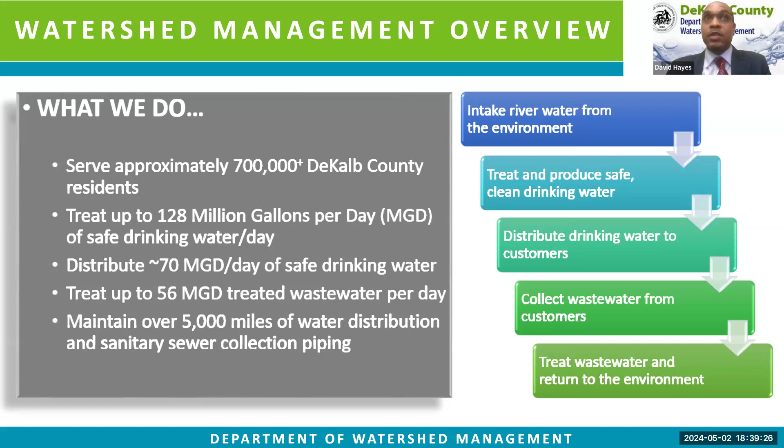We have put together a watershed master plan that was adopted by the board in 2021. That master plan identifies all of the watershed infrastructure throughout DeKalb County, its current condition and state. With that master plan, we have devised a systematic plan to address the most crucial areas first, with the goal to touch every single part of DeKalb County's water and sewer infrastructure, to renew it, to allow watershed to continue to grow and prosper and provide the service that ratepayers demand.

So why are we here today? We have Watershed's own engineering and construction division leading this initiative. They are here to help us correct the problems, and the problem in this situation is the aged infrastructure causing the concerns here. What we plan on doing is replace this infrastructure with new. We're going to have the team tell you the exact plan on what's going into the ground. When we replace this infrastructure, it's going to improve our customer service, and it's going to allow DeKalb to continue to grow, prosper, and bring more industry and residents to DeKalb for generations to come.

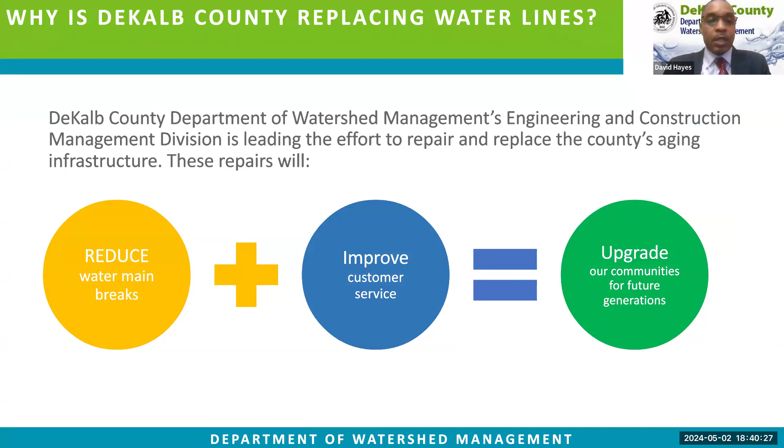Now you're going to hear from our Assistant Director of the Capital Improvement Project. She's going to explain to you why we're here and what we're going to do. She's going to give you a large overview of what we're going to do to correct the aged infrastructure on Woodacres. Ms. Marshall. Thank you, Director Hayes.

Good evening, my name is Cassandra Marshall. I am the Assistant Director of Capital Improvement Projects for Watershed Management. My duties include overseeing Watershed's $2.4 billion capital improvement program and also managing the construction management staff. In the next few slides, I will provide an overview of the system problems and our solution to repairing the aging water system.

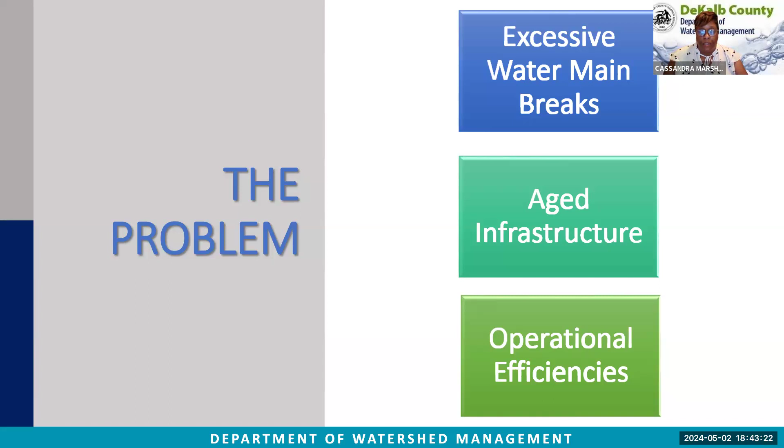So I want to give you a little background of all the components in the county water system and what it takes to analyze and prioritize what gets done first. The county has over 3,000 miles of pipe in the water system to maintain and provide drinking water to the ratepayers. We also have 4 pressure zones, 21 water storage facilities, 16 pumping stations, and 6 pressure regulating stations. As you can see, this is a large system to maintain.

Most of the system is aged and cannot be repaired or replaced all at once. Therefore, the county had to develop a best practice way to evaluate and prioritize how and when the piping will be replaced. The first objective was to model the system. In 2019, the county developed its first hydraulic model. A hydraulic water model is a computer simulation of the water system. The model can provide a big picture look at how the system should function and how it's functioning when you're having issues.

For example, it provides details such as system pressures, available water at fire hydrants, and how tank levels affect the system. To develop the model, we use the county GIS system, meter data of water usage from the billing system, and system facilities data such as water storage facilities and regulation stations.

Field testing was conducted to validate the data, and then the model was calibrated based on SCADA and field tests. The data was ultimately used to develop the county master plan and prioritize projects.

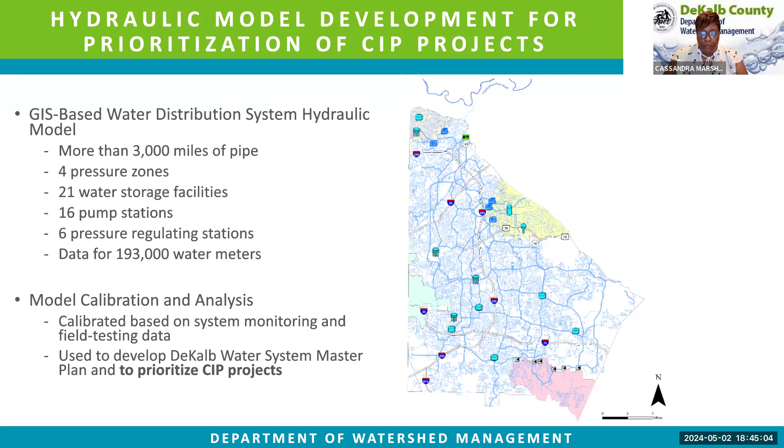So to this point of the presentation, you've heard about the problem. I will now speak about the solution and execution of the CIP plan. So what does CIP stand for? CIP, or Capital Improvement Project, is a project that helps maintain or improve an asset. It can either be new construction, an expansion, renovation, or replacement of existing infrastructure.

In 2021, the Board of Commissioners approved the new CIP program for $2.4 billion for projects to be completed between 2021 and 2030. On behalf of Watershed Management, the department is grateful to all of the commissioners who are partly responsible for the approval of the CIP plan. Thank you, Commissioner Patrick, and thank you, Commissioner Terry.

The Woodacres Water Main Replacement Project is a $6.9 million project included within that CIP plan. My team, the CIP team, is responsible for getting the work done. My team includes 4 DWM construction managers and 12 licensed inspectors.

Next up in the presentation, you will also hear from the DWM construction inspector, Mark Nooks. He will be your primary contact for any issues or complaints for this project, and he has over 20 years of construction experience. Along with in-house staff, we are also supported by consulting firms who help assist the county with construction management and inspection services.

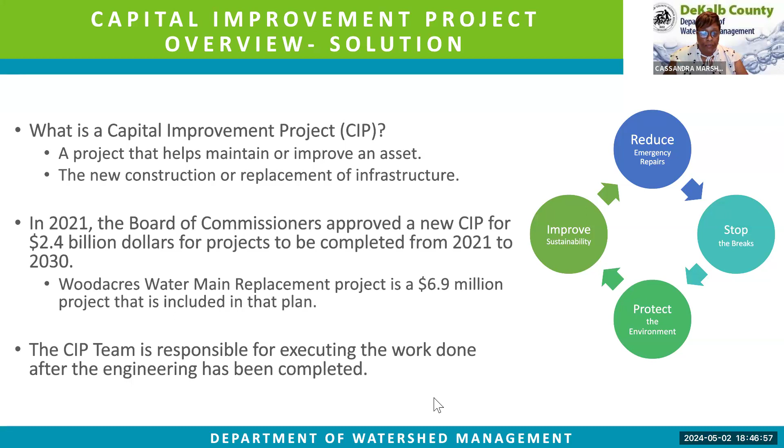You will now hear from Mr. Mark Nooks about the project scope and overview. Thank you, Ms. Marshall. Good evening, everyone, I hope you're doing well. My name is Mark Nooks, and I am the Senior Construction Inspector assigned to the Woodacres Water Main Replacement Project.

On the following slide, I will discuss the scope of the upcoming work planned for your neighborhood. The planned work includes installing nearly 12,000 linear feet of 8-inch ductile iron pipe water main, including service lines, hydrants, valves, pavement restoration, and setting water meters to grade. The trench will be milled and one lane resurfaced once the new water main installation is complete.

The existing 6-inch water main will be abandoned in place and filled with non-shrink grout. Site conditions will not be altered from existing. However, all disturbed pavement and landscape will be replaced in kind. Erosion control BMPs and tree protection will be installed throughout the entire water main alignment. No more than 1,000 linear feet of trench will be open at one time and must be filled and covered daily.

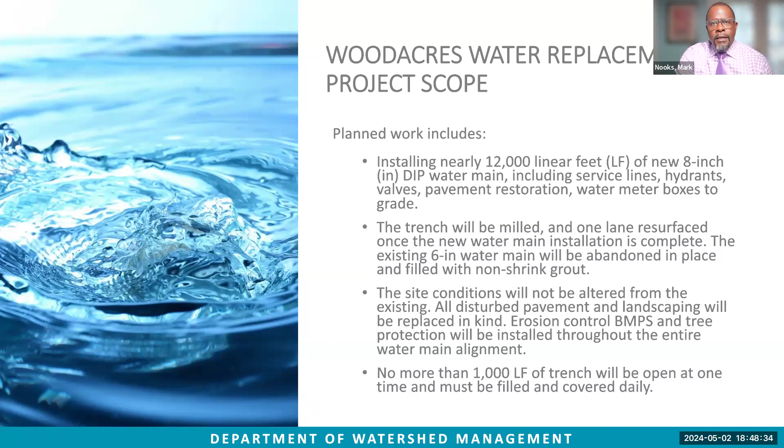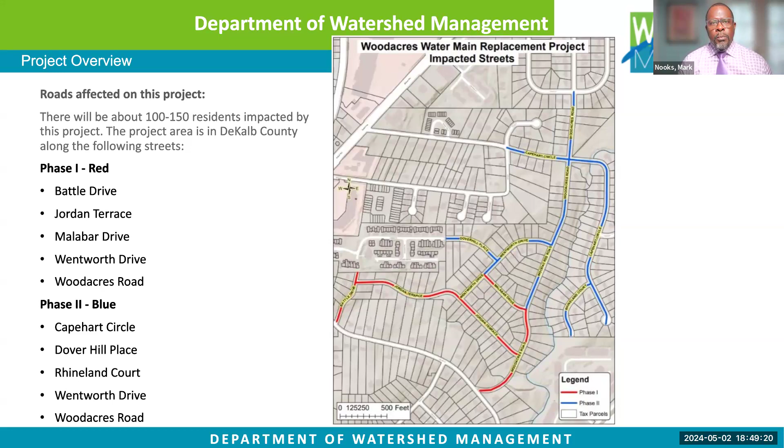We estimated approximately 100 to 150 residents will be impacted. The red line on the map represents phase 1, which includes Battle Drive, Jordan Terrace, Malabar Drive, and parts of Wentworth and Woodacres. Phase 2, represented by the blue line, includes Capehart Circle, Dover Hill Place, Rhineland Court, and also parts of Wentworth and Woodacres.

Now let's discuss the method of construction. The method of construction is defined as the open cut method. The open cut method consists of cutting the asphalt, digging the trench, installing the new water main, backfilling the trench, and replacing the asphalt.

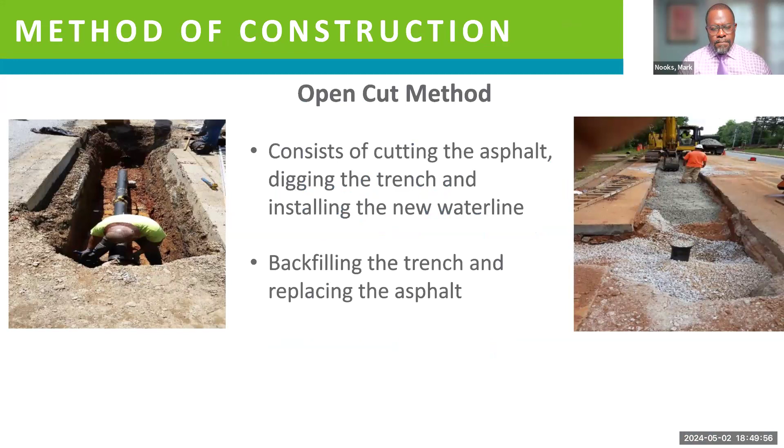Now, the duration of the project is as follows. Community notices were sent out in April 2024. We also staged 2 message boards, one at the corner of Battle Drive and Claremont Terrace, and the second at the corner of Capehart and Woodacres Drive.

Preparation and mobilization started on April 29th, 2024. We have a few crews out there now doing temporary surveys, finding utilities, and getting prepared for the construction start in May 2024. The final restoration, including asphalt paving, will be around March 2025, with the end of construction in May 2025. Let me note, these are tentative dates—depending on weather and unforeseen site conditions, the dates could change.

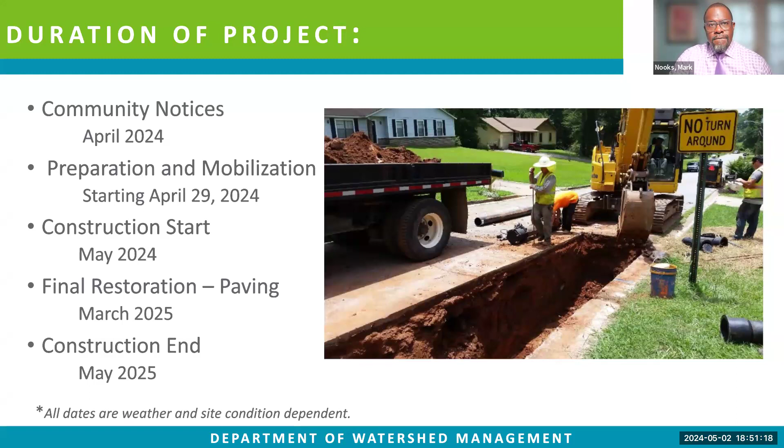My team and I are the first line of contact for the project. From the first day of construction start, my team will be on site to ensure that the construction activities, which includes ensuring that erosion and sedimentation controls are in place, ensure that the contractor is installing the pipe according to the contract documents, drawings, and specifications, and also ensuring that all safety measures are in place.

Once the project starts, you will see that we will have traffic control out there. I've been out there in the neighborhood, and there's a lot of winding roads, and the roads are kind of narrow. We'll have flaggers out there directing the traffic so that everybody can get in and out of their properties, in and out of the neighborhood as effectively as possible.

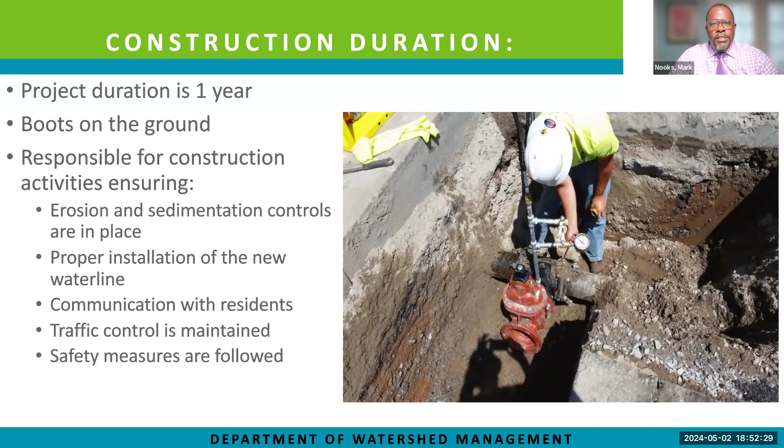Again, as I mentioned before, all trenches and holes will be backfilled and secured for the day.

Now, we've reached out to the property owners whose property will directly be impacted by the construction activities, and we have reached an agreement on restoration. Overall, the construction team will ensure that this project is completed and all property will be restored.

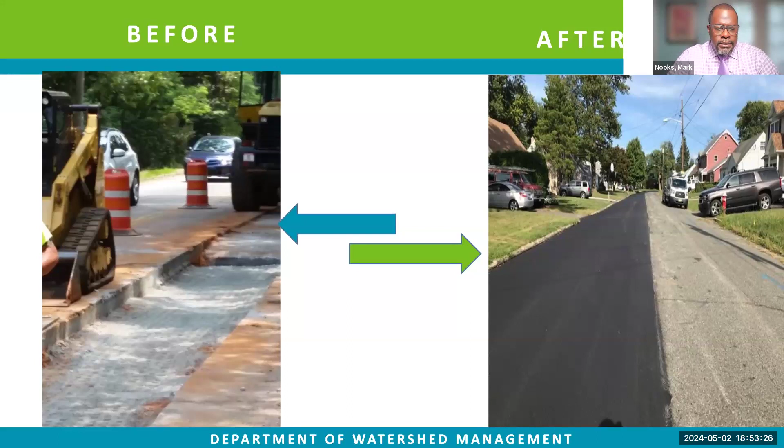I would like to take this time to thank you for your time. And now I will turn it back over to Ms. Cassandra Marshall, who will discuss the community awareness.

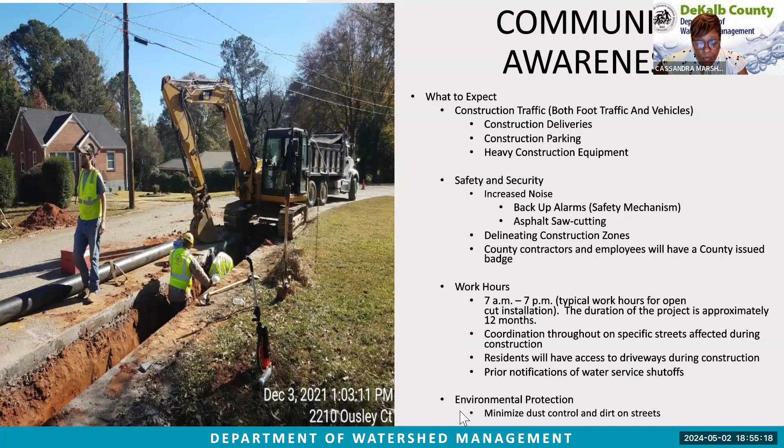Message board, as Mark said earlier, we've put out some message boards. The message boards are located at the corner of Battle Drive and Claremont Terrace, and Capehart Circle and Woodacres Drive.

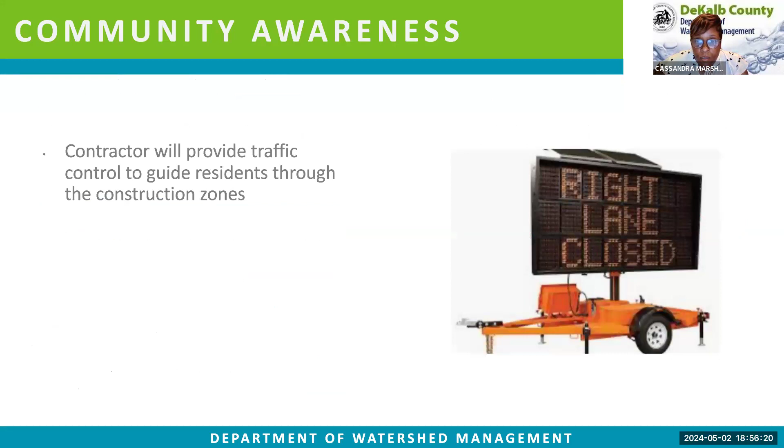Thank you, Ms. Marshall. Good evening, everyone. My name is Alicia Penny, and I'm the Public Relations Manager for the department, and I am responsible for all communications from the department for our capital improvement projects, as well as any other activities for the department. Next slide, please.

Ahead of tonight's meeting, you should have received a notification letter informing you of the construction and the project, as well as tonight's meeting. Going forward, you will receive either a letter or a door hanger indicating our next activities for the project. You can expect to receive that within 48 to 72 hours ahead of any new activities.

Also tonight, we ask that you please provide us with your email addresses in the chat, because that will be another way that we can communicate with you, especially if we have any emergencies related to the project. We would be very much appreciative if you take the time to provide us with your emails.